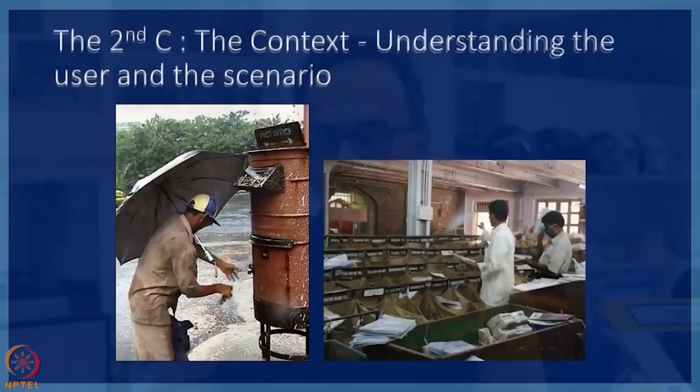The second C is the context. Like the context of L&T, the large enterprise of Larsen & Toubro, and the type of synergy they have, we need to understand context. When I went to India Post, I was shocked to see the context. The lowest division clerk is the one who opens the post box. Most of the times the lock is rusted, and they actually use a close-by stone to hammer the lock so that the rust comes off and the lock opens.

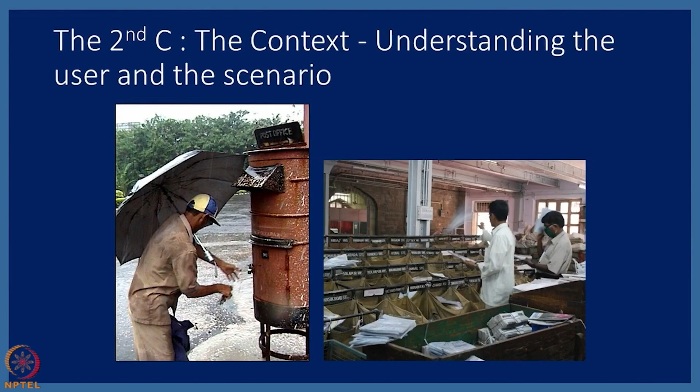You don't need rocket science to study this. As soon as we studied it, we said the lock should not rust. We went to Godrej and got a rust-proof lock - it doesn't take any effort. So that type of aspect is very critical. The second C is the context, where we understand the user and the scenario. The user and the scenario becomes the important second C, the context.

The third C, comprehension, is arriving at design insights. This is very important in design - you have to arrive at design insights and understand why such a thing happens. Why do letterboxes rust? Why do they take letterboxes? Where are letterboxes manufactured? Why do they use bad raw material in letterboxes? What are the costs involved? What are the quality standards they're using? A lot of issues are there.

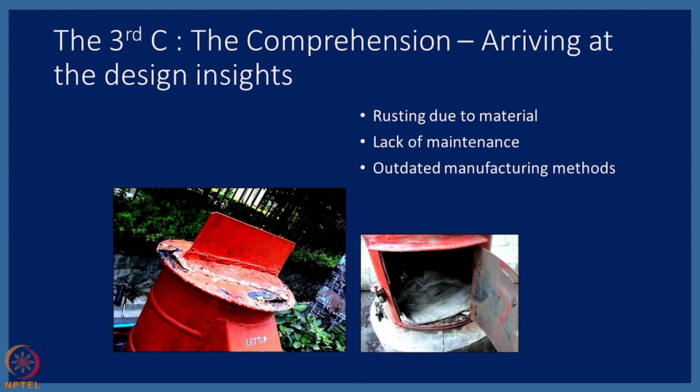Even a small girl should be able to post a letter even if her height is small. Then we also need to have a small box and large box. We call it the modular design. And then last but not the least, though this was not a brief, we said you to create a unique identity. It has to look good. So the unique identity also is a very important checkpoint.

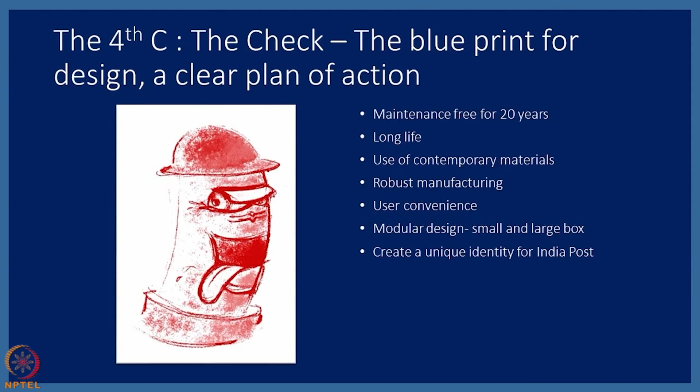And once you make a check, you have a blueprint for design, and it's called the product brief also most of the times. So now the next important aspect is conception. So we built a lot of sketches. The sketches and ideas were combined to make clusters. From clusters, we made concepts. You can see the 3 concepts over here.

The first concept here is the concept where you have the full sheet metal construction. The second concept, the red one, which you see on the right in the middle, is the concept where you use plastics molding in a big way. You could use roto molding, you can use injection molding. And the third one is a combination of metal bottom and top in plastic. So these 3 combinations are the ones which are working on the concepts.

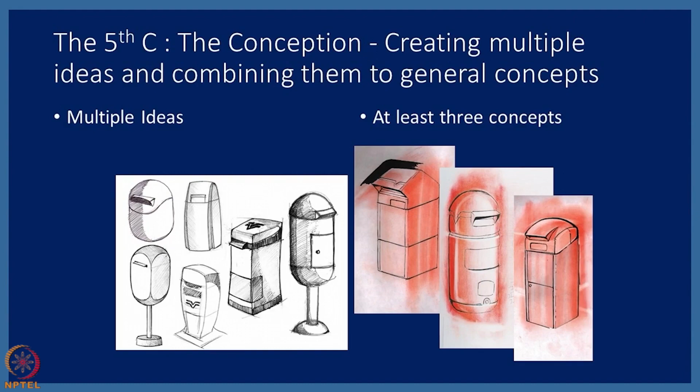So once your conception is ready, you go to the 6th C, that's the crafting. And from the innovation pivots, we had to go to the best manufacturing. I didn't even consider that I can go anywhere else. Our whole design journey was exactly from point of view of using the best materials, using the best technologies. So we went to Jindal manufacturing, went to the best laser cutting machines and the best CNC machines, and produced a box which would look very, very good and very professional, and also solve all the problems.

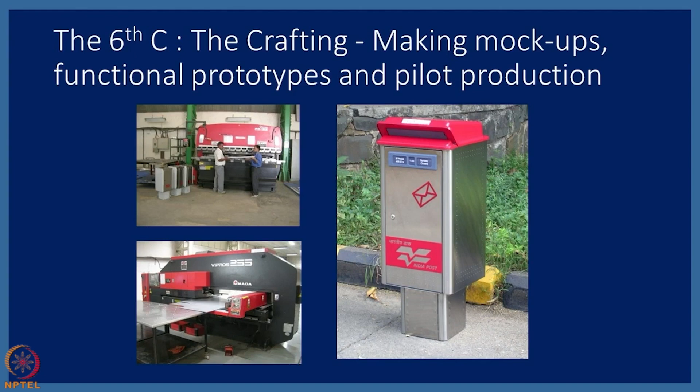So that's the crafting. We built prototypes, we built pilot. You can see the pilot production happening in Jindal factory over there. And then the first order of 20 had come to IIT Bombay. And we built those 20, and we put them all over the country. And we were very fortunate that during the 150-year celebration of India Post, the secretary and the ministers actually inaugurated our box as part of the connection, which is the 7C.

You need to connect back with your user. That's the very important aspect in innovation. If your connection fails, for example, the oval pump couldn't go to mass production, so innovation is not complete. Whereas in the Z-line pump and the bullet pump and the show fill, it became a runaway success where large quantities are in the field and the users are delighted with the product, then we can say that innovation has happened. So here, for example, we have the 7C, which is the connection, and it went through.

But a very interesting thing happened. As soon as they launched this as part of the celebration, they gave us an order of 200 numbers and asked us to produce it. That was a very big challenge for us. So we actually collaborated with 4 companies. We collaborated with Hilti for the bolts. We collaborated with Godrej for the locks. We collaborated with GE Plastics for the Geloy material, which is the top in red color, and we collaborated with Jindal to work on the stainless steel, and the manufacturing was done by Jindal Architecture.

And we used the best design. You can see, I've become an expert on sheet metal because of my L&T experience, and we had some beautiful design where you don't see any embellishments, you don't see any welding marks, and the product became an icon for their 150 years. And after the 200 order came, we supplied these 200 all over the country.